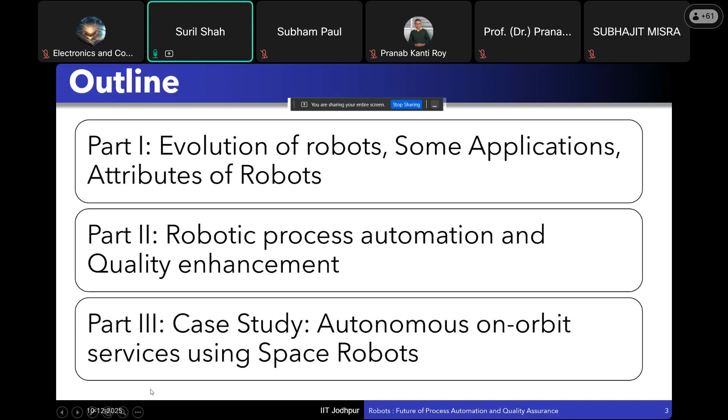I'll begin with the evolution of robots, starting with this image, which is the imagination of Leonardo da Vinci, a scientist and artist. He visualized a robot as something like a human, using pulleys, gears, and belt drives. This was conceptualized by him in 1495.

There was a lot of interesting work being done in the past that got lost. Similarly, this work also got lost and was rediscovered in 1950. Now its inner workings are displayed in a museum in Berlin.

Later, William Goodwin in 1867 came up with the design of a mechanical horse. Again, you can see a lot of gears, pulleys, and belts, reflecting the initial thought process of a robot that would imitate either a human or an animal mammal.

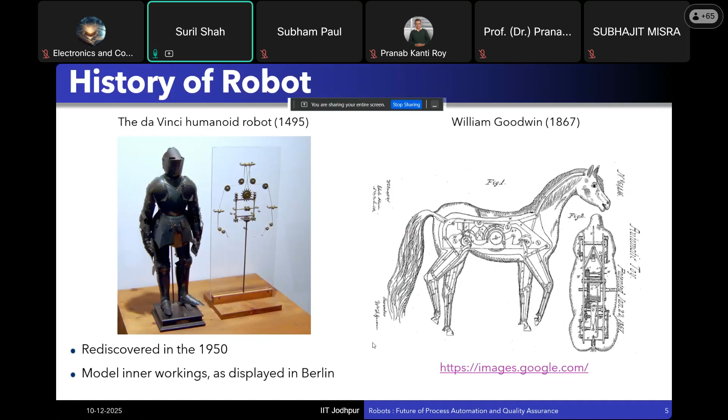However, the word 'robot' became popular in 1921 through Rossum's Universal Robot by Karel Capek, which featured characters such as robots, playing an important role in increasing the publicity of the word robot.

It became very popular in 1950, when Isaac Asimov wrote a fiction called 'I, Robot' and also gave the 3 laws of robotics. We may not get into these laws, but we'll see how the field of robotics evolved, with various researchers starting to work in this area during this time.

However, if you look at the initial thought process of Leonardo da Vinci or William Goodwin, they conceived a robot as a mammal or human, or a structure similar to one. But the first robot built or conceived for industrial usage was like a human arm—it didn't mimic the entire human, just the arm.

The first robot was created by Unimation Technology and was known as the Unimate robot, in 1961.

I'd like to emphasize one aspect: in contrast to a human arm, which has all revolute type joints such as spherical or revolute joints and a spherical wrist, the first industrial robot had a prismatic joint. We appreciate that a prismatic joint requires regular routine maintenance—like a vehicle with an IC engine that needs regular lubrication and servicing as dust accumulates. On the other hand, door hinges we hardly ever lubricate, unless they start making noise.

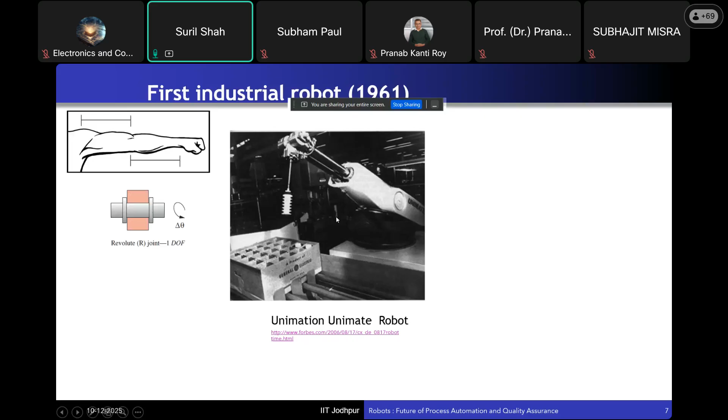Later, most industrial robots that replicate the human arm came to have 6 degrees of freedom. Here is one such robot, the Cincinnati Milacron T3 robot, which has all revolute joints, because with the advent of computational resources, we now have good capability to solve kinematics problems related to robotics.

This was in 1961 when the first robot was being built, and subsequently we find a lot of industrial robots in industries. I would like to emphasize that the original notion of robot was a manipulator arm used in factory automation. However, since 1961, there has been a lot of progress in the field of robotics, and its application and usage has penetrated various fields. I would briefly like to highlight some of the innovations which were done subsequently from 1961.

I would like to highlight this robot which was built by Stanford University, named Shakey, in 1969. The unique feature of this robot was that it was the first fully autonomous robot. It had a camera, rangefinder, bump detector, onboard logic. I like to highlight the year because I always tell students that if you are building something in your robotics lab or hobby club, at least you should build something better than Shakey, which was built in 1969.

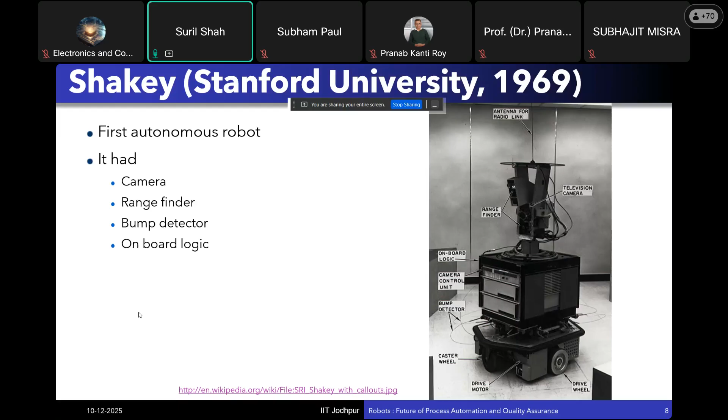Moving forward, I thought of introducing some work which will play a very important role in time to come, and which also aligned with the dream of William Goodwin, who gave the conceptual design of a mechanical horse. A researcher named Marc Raibert at Carnegie Mellon University started working on legged robots. He started with a one-legged hopping robot just to understand how robots balance themselves. I would like to show some of the videos.

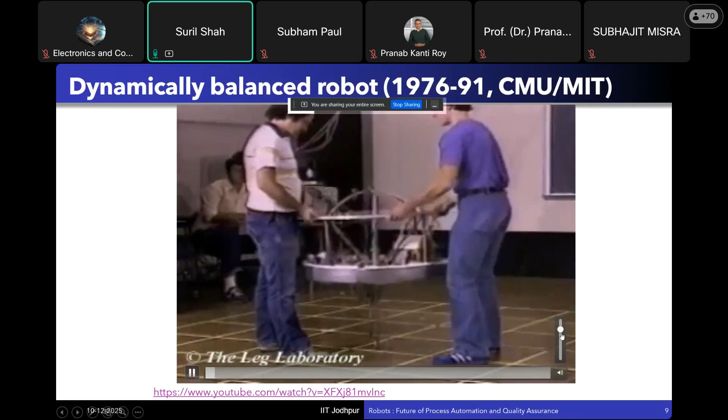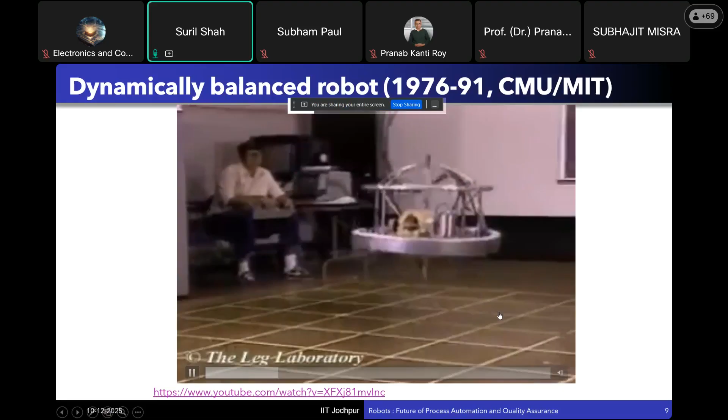Here you can see they have done very systematic studies on the one-legged robot. It is a kangaroo-like hopping robot, hopping on one leg. There is a well-defined environment, with square blocks on the ground, so it is working in a very well-defined environment. Subsequently, they introduced two legs. All this work was done from the duration 1976 to 1991.

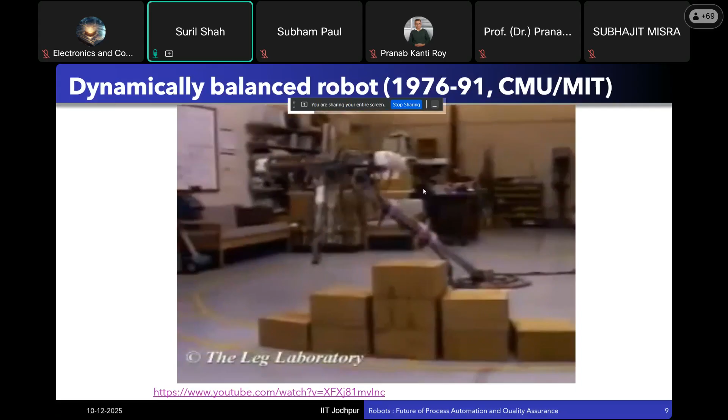You can see they also tried out high-speed locomotion with bipedal robots. They tried obstacle avoidance, where this two-legged robot was able to jump over obstacles, and it was also able to do a somersault. They did a lot of studies and tests. This was a very interesting set of research done by Marc Raibert and his group.

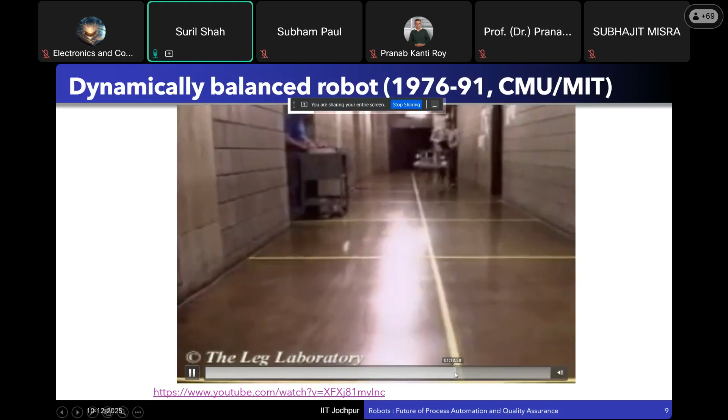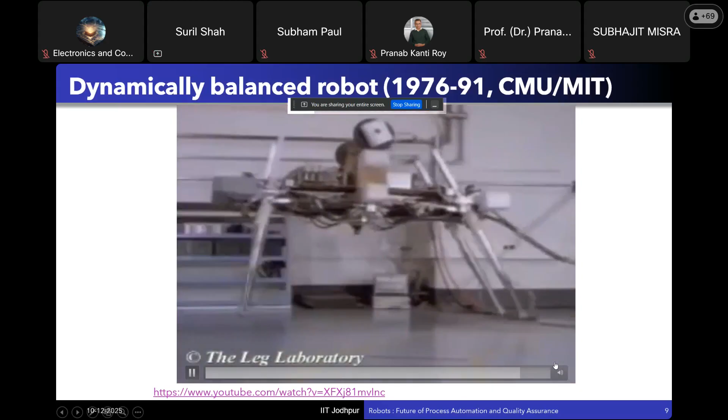Subsequently, they also extended this to a four-legged robot, and came up with an interesting set of results which are still being used by researchers working in the area of robotics. They tried out different gaits of legged robots. This was a very interesting set of activity taken up after the evolution of the industrial robot as a human arm, or something similar to a human arm.

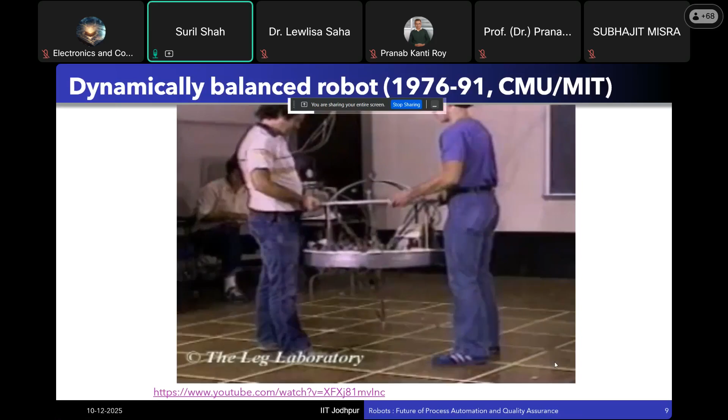Now moving forward, I'll come back to today. And when I say today, it may be 2-3 years ago or 3-4 years ago. This video is not the most recent video by Boston Dynamics. There has been a lot of interesting work done subsequently, but there is a link between the previous video and this one: the researcher who did work at CMU and MIT subsequently started his company called Boston Dynamics, which was acquired by Google, then Hyundai, and various others. It has created a very interesting set of robots which are going to play an important role in manufacturing as well as automation and quality assurance.

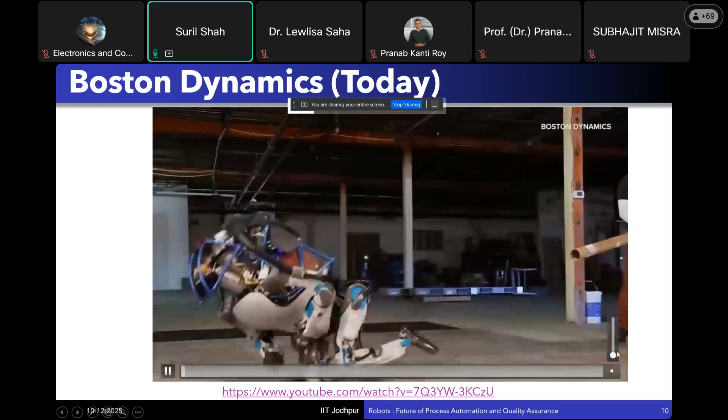I thought of showing this one video which summarizes the capability that we have achieved today, and a lot more than what I am showing has been achieved, because this video is a little old, but it will still give some idea of what we have achieved in the last few years.

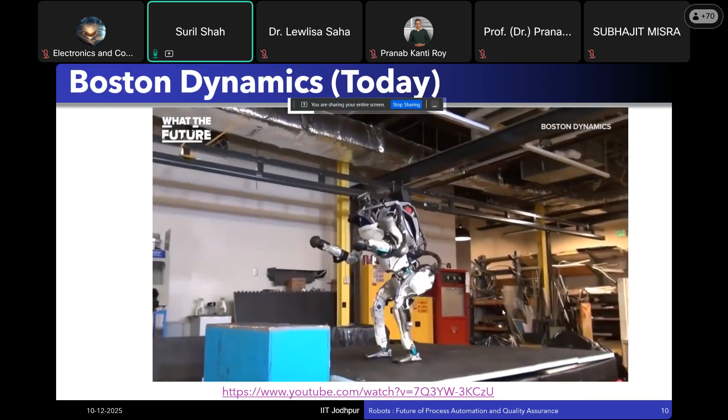Now you may see that these robots are not working in a very well-defined environment. There are no markers on the ground. These robots have come outside the laboratory, and have the capability to move on snowy terrain, jump from one obstacle to another without any marker on the ground. They have better stability than the robots shown earlier. They can be ready very soon to work alongside or replace humans in various workplaces and warehouses. They have the capability to stand on their own and learn from their mistakes.

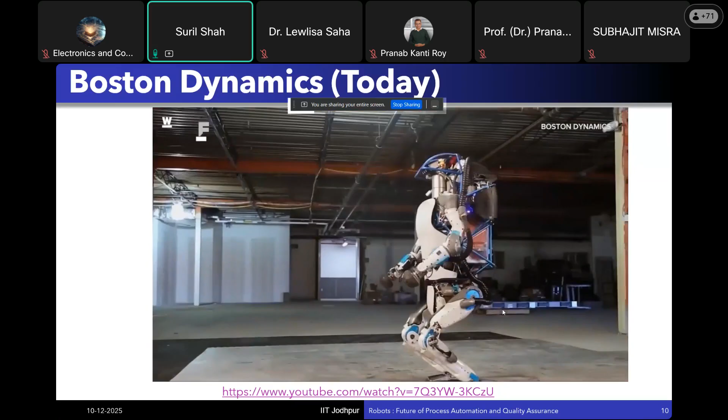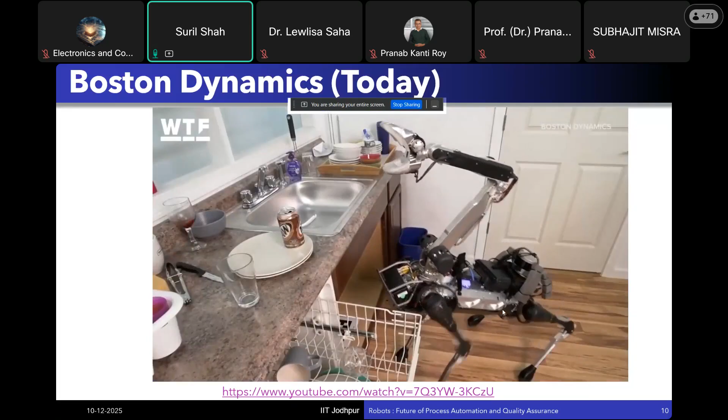Here is a very interesting robot known as Spot Mini. It is a four-legged robot carrying a manipulator, and it is opening a door based on its vision sensor. There is a robot, the same one, being used in the kitchen for object manipulation. It has a wonderful ability to climb stairs, and you can see how smoothly it climbs them.

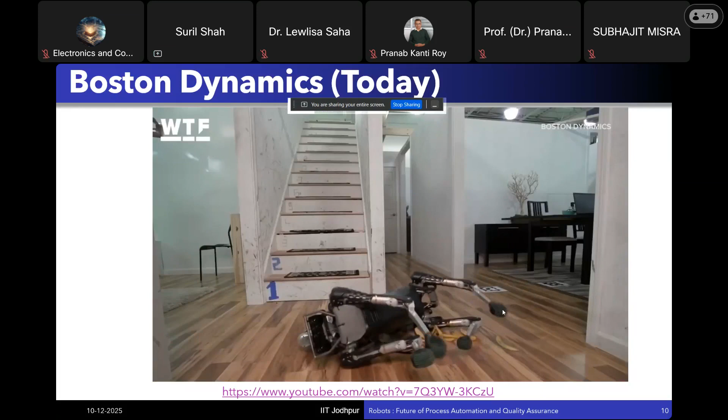It can rebalance itself, and now there are a lot of companies, and even in India, people have started building and making four-legged robots, and you will see that in time to come, that will play a very important role in industry automation.

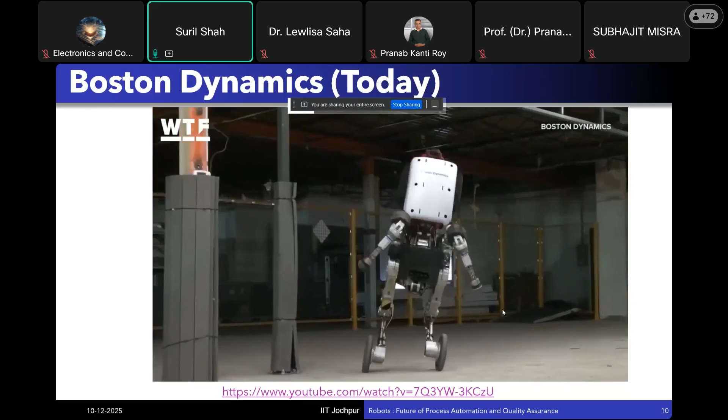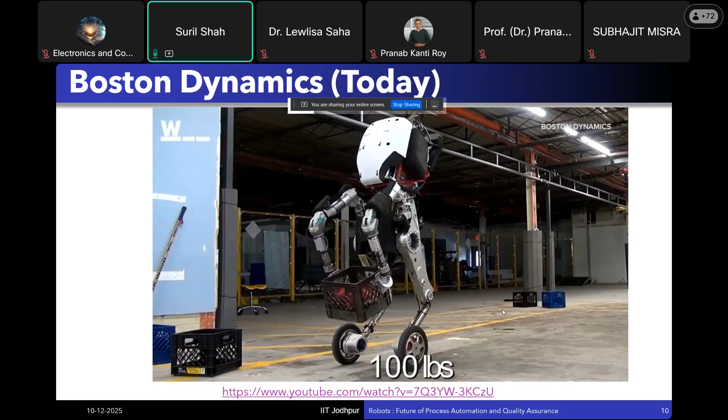Here is another interesting robot which is having wheel-leg combination. It is having two legs, however, the legs are attached with wheel at the end, which will essentially give us speed, better stability, and ability to lift heavier object. It employs intricate control strategy in achieving the capability that it has. Here you can see that it is doing endpoint control.

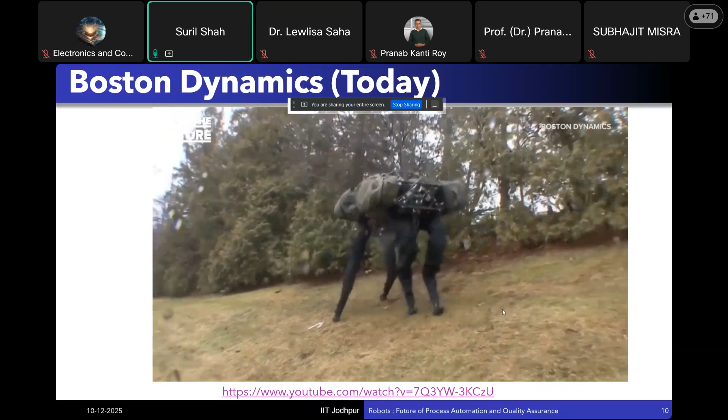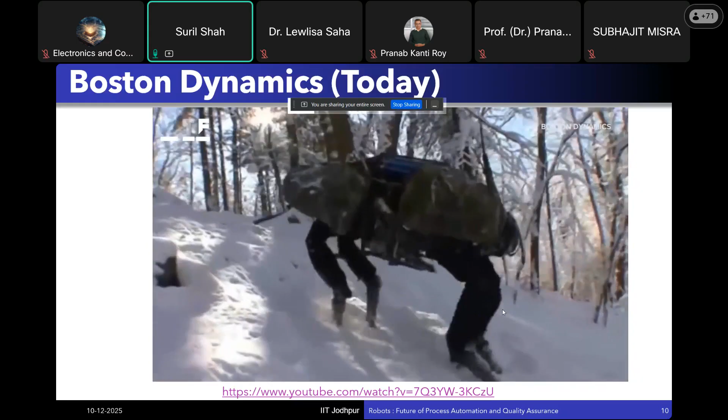This is another famous big dog robot, which you may see is negotiating uneven terrain. It is also taking external disturbances in the form of a kick, which was given on a slopy terrain. It is able to negotiate snow, even icy terrain, and such robots are going to play an important role in time to come, especially in defense application. You can see that it is able to negotiate terrain such as snow.

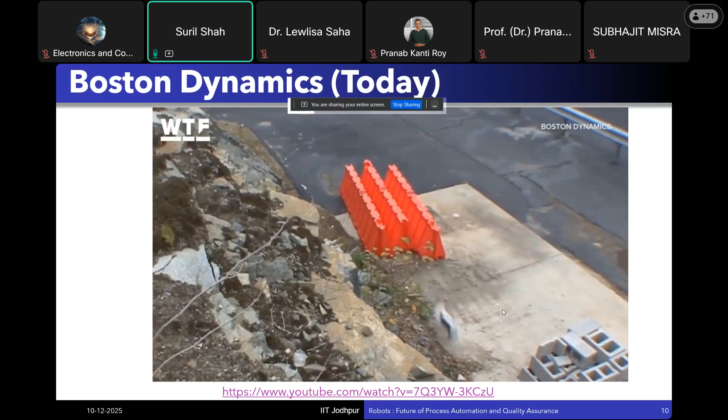This is a very interesting set of robots I thought of showing, because any idea that you may create may not require a lot of money, but it requires creativity. You can see that it's a very small robot, not very costly, but it can climb higher heights. For creating something amazing, you require creativity rather than money, and that's where we need to encourage our students to focus.

So I thought of showing some of the development, and now there are many more interesting robots with better capabilities that have come up, and you may find these robots on YouTube. But I just wanted to show the journey of an academician who started his career at CMU and MIT, spent 20 years of his research, and subsequently ventured into product development, now creating some of the best robots in the world. If he can do it, then many of us can also think of taking this journey in time to come.

With this brief introduction of how advancement of robots has happened, from industrial robots to the diversity of robots that we are having, I would also like to emphasize that application of robots is not limited to industrial environments such as automobile industry, where you will find thousands of robots in the assembly line. There are many applications which have come up, and I thought it is very important to look at these applications, because automation is not only limited to industry.

I'll focus on how robots combined with automation will bring in inbuilt quality assurance, and that can be seen in various fields and aspects. That's why I thought of showing some applications which would give you an idea of the broad perspective or application domains that one will have to deal with as far as robotics is concerned.

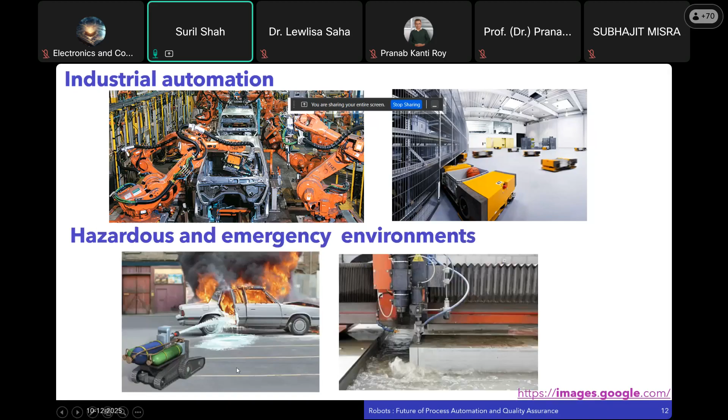Robots can also be used in emergency and hazardous environments, as can be seen here, where robots can play an important role and replace humans in environments which could be dangerous to humans.

It can be used increasingly in surveillance and exploration applications in time to come. In fact, they are being used today as well.

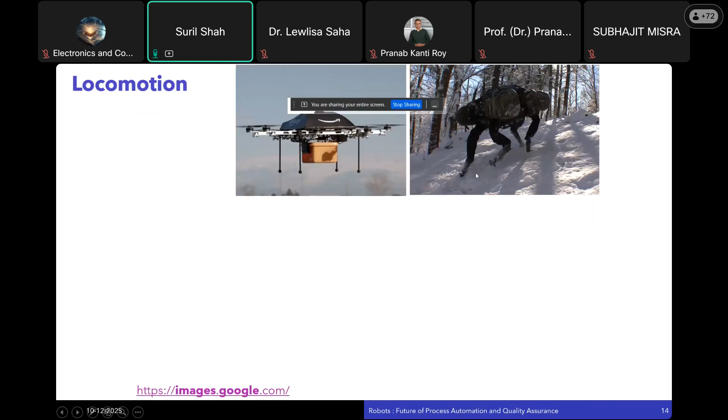Robots can also be used for locomotion. For example, Amazon long ago started its priority service based on drones in the USA. And here is the big dog, which we already saw in the video, which can be used for locomotion purposes, and it has a defense application.

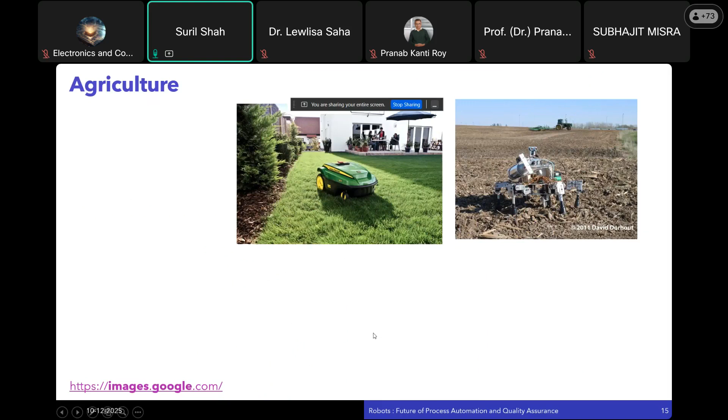Moving forward, in agricultural industries there is a shortage of workers, and there are a lot of robotic applications being developed, including large machines. However, not every farmer can afford these large machines. On the other hand, one can always have robotic solutions which are cheaper, smaller, simpler, and can be used even by farmers who are not very rich.

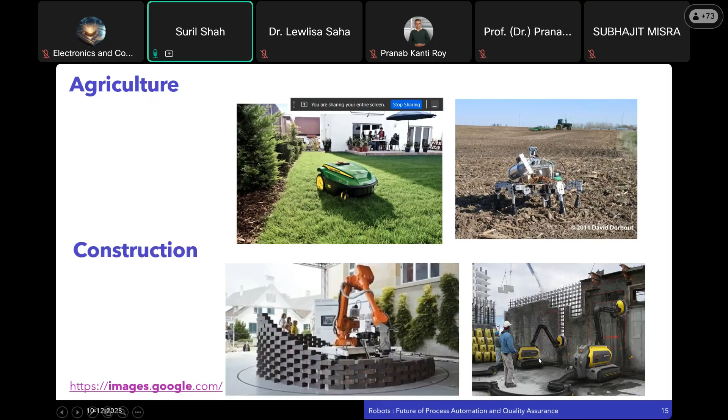There are also applications where robots are being used for construction, or 3D printing of houses. Here you can see images where robots are being used in construction applications.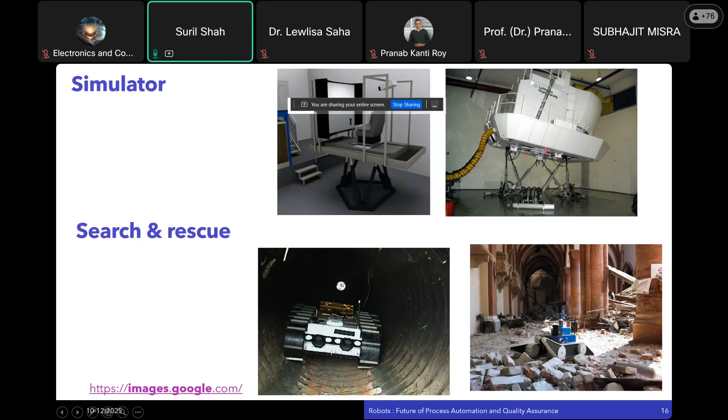There are robots which can be used for certain rescue applications. Specifically, the second image shows a robot named Packbot, which was being used during 9/11.

There are robots being used for surgical applications, and even in my city, Jodhpur, a few years back AIIMS Jodhpur very proudly mentioned that they had completed 1,000 robotic surgeries. In fact, that was 5-6 years back, and by this time they must have done more than 5,000 robotic surgeries in the city of Jodhpur.

There are also micro and nano robots, and there is a lot of ongoing research into robots that will get into the human body and perform amazing repair and other tasks in time to come, which will certainly give us longevity.

There are also other categories of robots known as exoskeletons. They are like wearable robots. In the first image, you can see a wearable robot that can be worn by a human worker, which will uplift the capability of the worker in doing work.

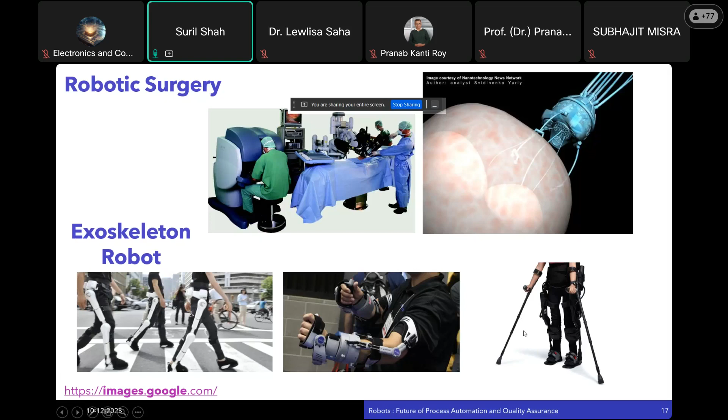One can also use exoskeleton devices for gaming and other purposes. Here you can see a person with disability being enabled by an exoskeleton. These are all actuated exoskeletons, as shown in the first and third images, giving the capability to humans to walk.

There are also a lot of assistive robots that will be used in homes, shop floors, laboratories, and various other places. You may find vacuum cleaning robots now very cheaply available on Flipkart and Amazon, easy to purchase, doing a lot of cleaning. Their quality and precision has also improved over time, and this kind of robot is going to play an important role in the service industry in time to come.

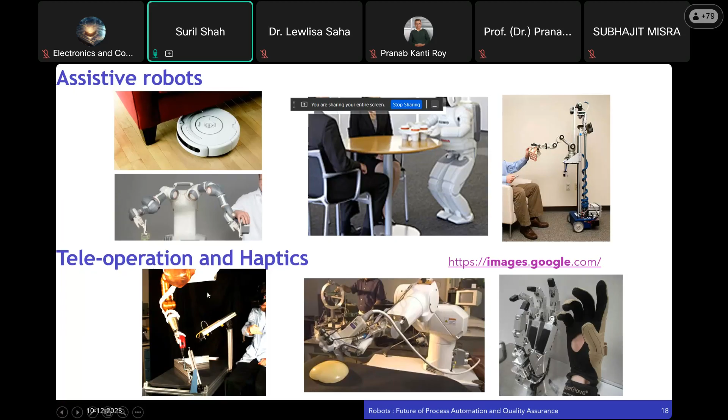There's also another use case where robots are used for teleoperation. There may be scenarios such as nuclear plants or other applications where teleoperation plays an important role, with a human teleoperating the robot. That's another interesting area. Haptics is the sense of touch, and robots are being deployed for teleoperation with the help of exoskeletons, as seen in the previous slide.

I thought of showing this simple video, which is also old, and there's been a lot of progress done subsequently. But it gives us an idea that today the field of robotics has penetrated workplaces and shop floors in many developed countries, and will increasingly come into the picture in various industrial environments in the Indian economic scenario.

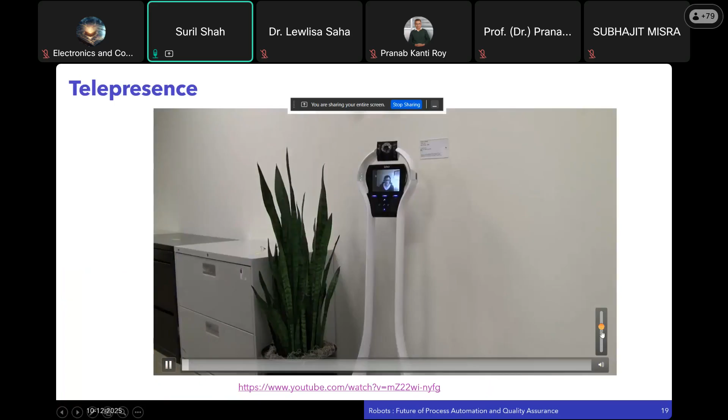I'll quickly take you through this video where there is a simple mobile robot in a workplace environment, where the boss has entered into this robot and is interacting with an employee, getting updates on things. Such robots are very cheaply available today and are being deployed. So telepresence through robots would be very important and will play an important role in time to come.

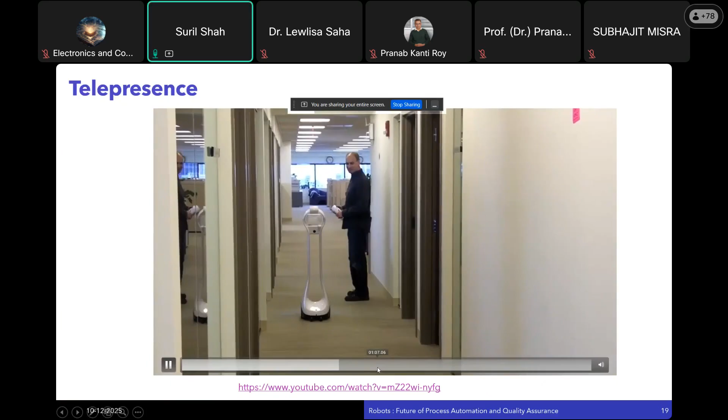Yes, I'll fast forward and summarize the first part. I wanted to emphasize one aspect: the notion of what qualifies as a robot has changed greatly over the years. Long ago I stopped giving the laws of robotics by Asimov because those laws have evolved over time, and even the robot itself has evolved. Now you find different kinds of robots used in different applications. It's important to revisit the definition of robot and its defining attributes, which is what I'll focus on before the main presentation. So it's important to understand what are the attributes of a robot, what does it do, and how do we define it.

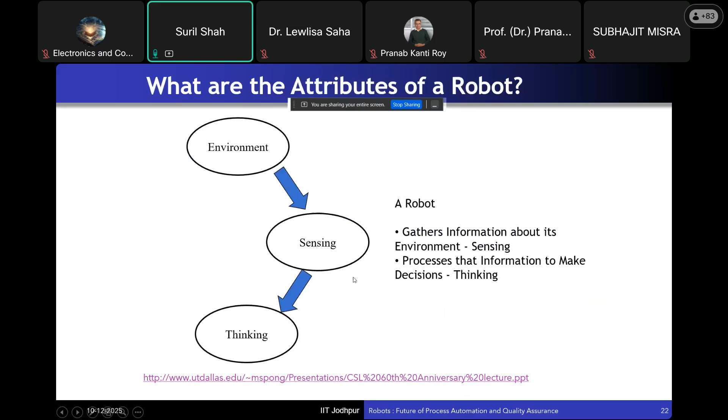The primary work a robot does: first, it gathers information about its environment and obstacles around it through sensing. Next, it tries to localize and process this information to make subsequent decisions - that's thinking. So it senses information, performs thinking, and whatever action it takes is based on this sensing and thinking. If we improve the sensing and thinking ability, the quality of action and its consequences will also improve. So first is sensing, second is thinking, and third is acting on the environment - these are the main attributes of a robot.

So any robot that you think of senses the information, processes it, thinks about it, and then comes up with an action. It applies the action and then again looks at what is the consequence of the action taken by the robot.

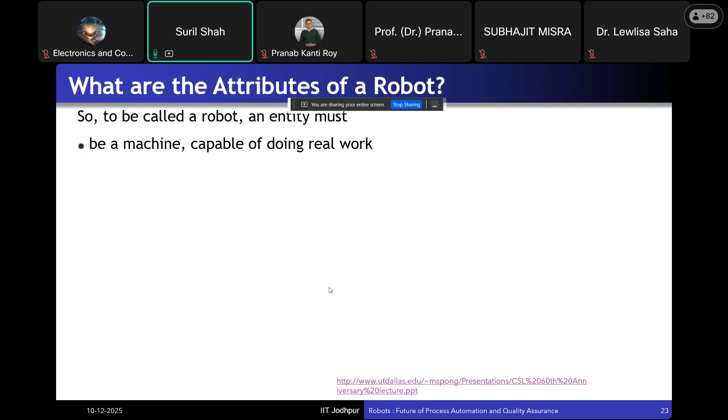So how do we define a robot? To be called a robot, an entity must be a machine capable of doing some real work. That's the primary requirement. As it performs sensing and makes decisions based on thinking, and whatever action it takes on the environment, it again gets feedback in terms of sensing. So it should be able to work in closed loop fashion under computer control. Therefore, a robot is a mechatronic system, at the heart of which is feedback control.

Control has taken on a different role today. When I talk about control, it may not be classical control - it could be data-driven control, stochastic or predictive control, or even learning-based control such as reinforcement learning. That is going to be the heart of the robot, surrounded by sensing, which is very important. You'll have software, electronics, and mechanics. Whatever action it takes is purely based on the feedback control law, which allows autonomy and performance in unstructured environments with obstacles, clutter, dynamic obstacles, and even human beings. Learning is going to play an important role - it is and will continue to be important in achieving autonomy and performance in unstructured environments.

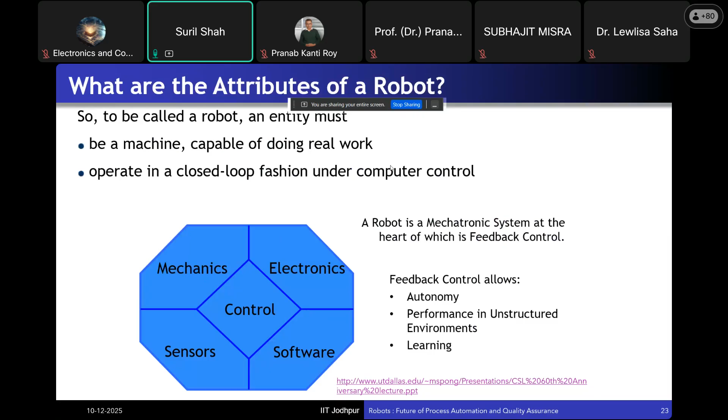So I would like to show you one such humanoid robot - the humanoid by Honda. This is an old video, my apologies for showing old videos for this presentation, but these are still relevant. I thought of showing this.

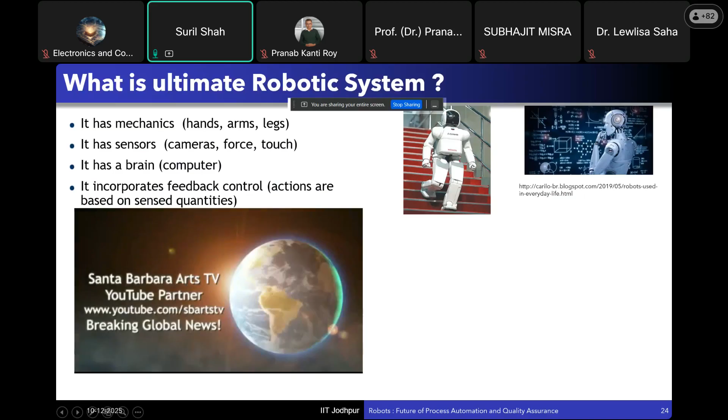So this is a video released a few years back by Honda, where you can see that this humanoid is able to navigate in an unstructured, unknown environment. It is able to avoid obstacles in the form of humans, so it has a very interesting set of capabilities. Now let's try to have a look at the walk of the humanoid, the way it is walking.

So maybe there is a question for participants. Do you have any observation about the way this humanoid is walking? Whether participants have any observation? I'll keep this video running, and if you can just observe the way this robot is walking, do you have any comments to make? Whether it is a very conservative walk?

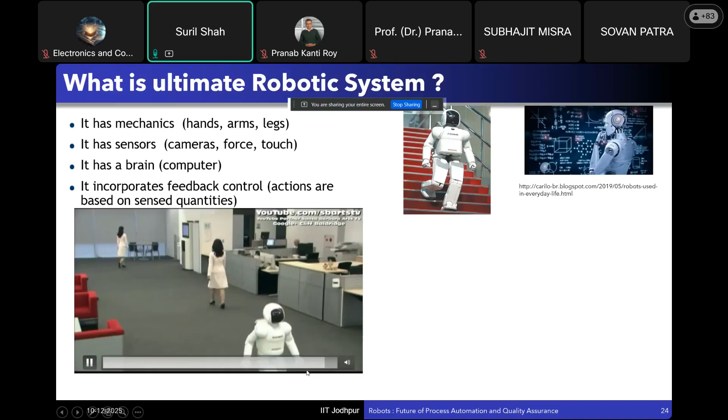And hence, if you carefully see this walk, the robot is bending its knee and walking, which obviously is an energy-consuming task.

Now, robots today consume a lot of energy, and we need robots which are more natural and consume less energy. There are limitations as far as actuation and sensing are concerned. If we can cross this threshold of sensing, actuation, and energy, obviously we have made a lot of progress as far as AI algorithms are concerned, but once we cross this threshold of getting highly responsive sensors and actuators, we may be able to achieve much more in time to come.

Nevertheless, I would like to show one more video, and before I move to the next phase of this presentation, I would like to ask one question to all the participants. Please carefully look at this video. I'll rerun this video.

So don't you think that this robot is walking like a casual college-goer, and it is walking in much better manner than the Honda robot which I have shown? Any guess about how many actuators the second robot uses?

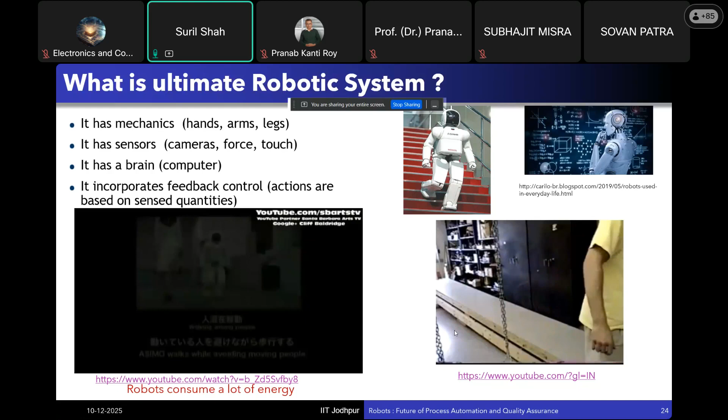Yeah, it will be around 6 or 7. So the interesting part is I will run this video again, and I would like to emphasize that it is not having any actuator at all. It is walking down the gravity, and you can actually create a structure which can, without motor, walk naturally down the gravity. And if we can do this, can we try to adapt some of the principles of dynamic walking, the way we get into a natural rhythm and keep on walking with minimal energy, and create today's modern machine? That's where there is a lot of effort and work being done in today's world. Can we create energy efficient robots which can tackle challenging environments?

So considering this background, I thought let me now get into the main topic, which is robotic process automation and quality enhancement. And me being a roboticist, I see that if we try to use robots for automation, it will automatically lead to quality enhancement, and that's what I would be focusing on in today's talk. I would again like to reiterate that this topic is very important as major industries across the globe are moving towards intelligent, adaptive and data-driven manufacturing. And if you would like to compete with China, it is very important that we use robots for process automation and quality assurance, as we are much behind what they have achieved in terms of factories. You'll also get some idea as I move ahead in the second part of the presentation.

So let me give you some statistics. As far as the automation market is concerned, it is expected to grow significantly in time to come, and it is projected that by 2032, the market would be worth 600 billion US dollars. In addition to that, AI will also penetrate significantly in the area of manufacturing, and its usage will increase 5 times what we are having today. This is the number given.

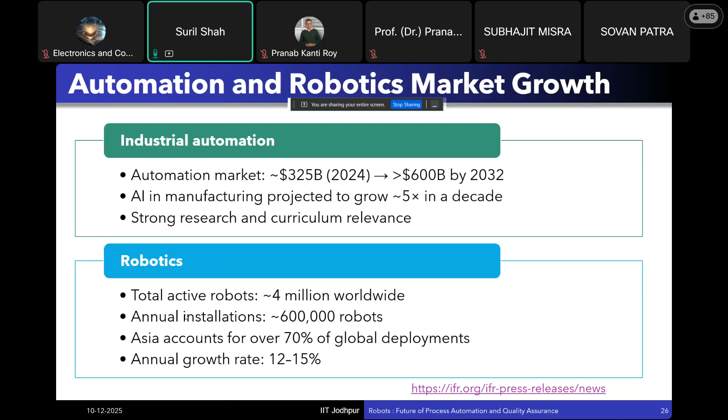When I say robotics, this refers to all kinds of robots, industrial robots as well as service robotics. I would like to give you this image, which essentially focuses on industrial robots, which are being increasingly used in manufacturing applications for handling, assembling and deassembling, welding, soldering, clean room, dispensing, processing, and others. It is projected that today we are in 2025, and by 2033, the market will grow by 163.9 billion US dollars, expected to grow with a CAGR of 11.5. So here we are majorly referring to industrial robots, which are increasingly used in manufacturing industries.

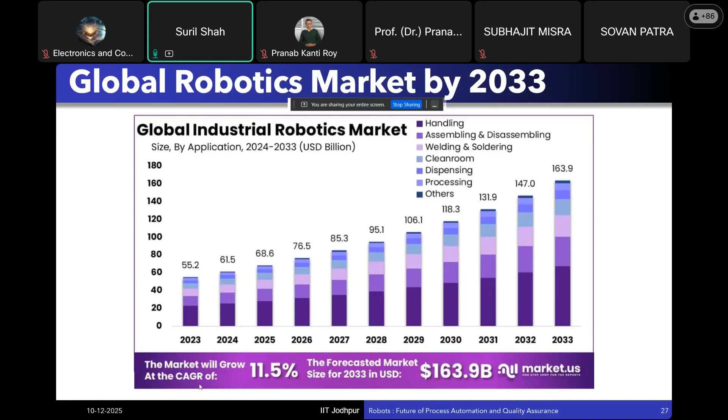So when we talk about nation building, Make in India, this is going to play an important role. This number is significant, and this is also an opportunity for people like us who have been working in the area of manufacturing, robotics, automation, where we see significant opportunity. We need to develop interesting curriculum and workforce in the form of students, who will participate in industrial growth in time to come, because this number in time to come will significantly increase in India.

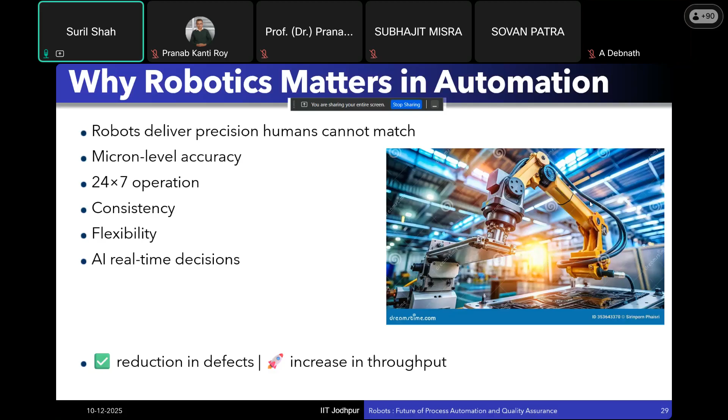So if I compare or summarize the process impact of manual intervention versus robotic, we can say that robots can outperform in terms of speed. They are much faster. They work objectively, are highly scalable, and the error rate they generate is also significantly lower. That's one of the reasons robots should be used in automation. In a subsequent slide, I'll show that when you use robots in automation, quality assurance is inbuilt.

It significantly improves the quality of product. Rather than seeing robots as quality inspectors, we see that robots are contributing to increasing overall quality of the product.

I would also like to touch upon the Industry 4.5/5.0 revolution. Professor Kaushal must have mentioned Industry 4.0 in his first talk, and given a nice journey from Industry 1.0 to 5.0. I'll talk about Industry 5.0, which talks about collaborating with humans, which essentially would lead to sustainable manufacturing. It will try to take away some of the limitations of Industry 4.0, which is machine heavy.

On the other hand, Industry 5.0 talks about sustainable manufacturing, where robots will collaborate with humans, take AI-powered decisions, and take away some of the tasks which are repetitive, cumbersome, where human subjectivity will increasingly affect accuracy, quality, and hazardous tasks. In fact, it will amplify the creativity of humans, because humans are inherently creative, and autonomy, achieved through AI-powered decisions, will amplify humans' creativity.

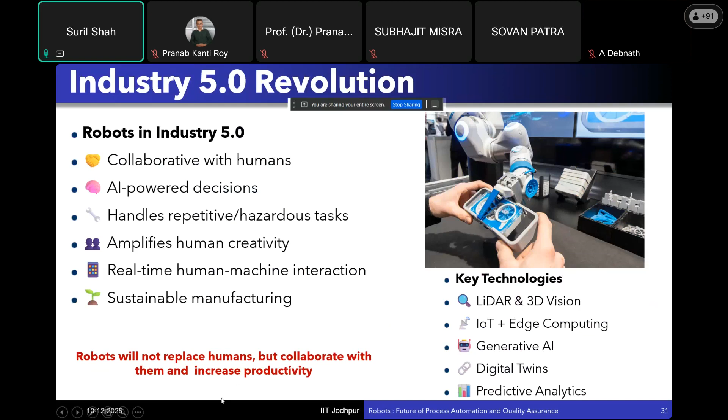Moving forward, at this juncture, I would like to emphasize—we have seen a gamut of robots in applications of robots. However, I would like to emphasize these three robots which are going to be increasingly used in industrial environments in time to come: industrial robots, the robots you've seen in assembly lines of automobile industries, used for pick and place operations, welding, painting.

This robot will get embedded with the emergence of Industry 5.0, and knowing the fact that now robots are not meant to be kept in cages, they'll be working along with humans, collaborating with humans, and we need to create an environment which is safe for human-robot collaborative work.

And the second category of robot would be collaborative robots. In addition, there will be a lot of mobile robots, which could be wheeled robots, legged robots, automated guided vehicles, which would be used increasingly on the shop floor and which would give mobility, logistic advantage, and enable material flow. So these are the three kinds of robots primarily going to play a very important role in time to come as far as industrial automation is concerned.

Now, it is not only robots, but there is also a very popular notion known as robotic process automation. Robotic process automation uses a robotic agent - not a real hardware, but a robotic agent which follows a set of rules given by input data, and it performs automated testing and quality assurance.

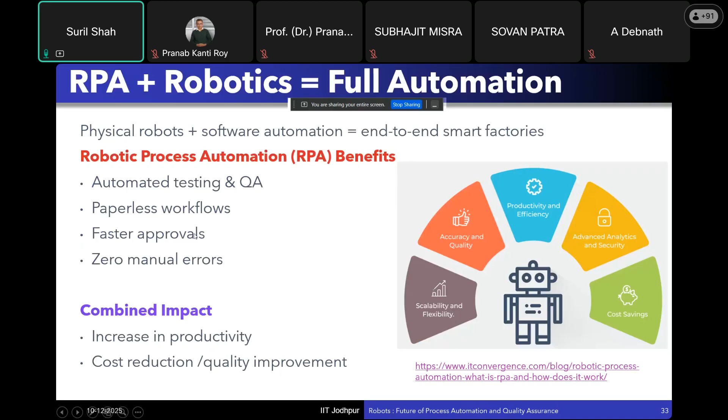So with this foundation, I'd like to go back to the main theme of this talk, which is process automation. If we try to understand process automation, it essentially tries to achieve automation by encouraging machines and software with minimal human intervention. Process automation leads to significant productivity, safety, and quality, and as I've been repeatedly telling, it is key to smart manufacturing that we are trying to see today getting implemented even in the Indian scenario.

On the other hand, we have seen some capability of robots, where robots are consistent performers, do tasks repeatedly, and create products of similar accuracy day after day. So high accuracy, repeatability - it can handle repetitive tasks, avoid subjectivity of human error, reduce human fatigue, and enhance workspace safety. So when I do process automation using robots, it eventually leads to quality assurance, and the outcome would be significant improvement in dimensional accuracy, uniform product appearance, lower defect and rejection rates, and higher customer satisfaction.

Hence, what I'd like to emphasize, being a roboticist, is that robots build quality directly into the process rather than just inspecting it at the end. So let's not see robots as a quality inspector - we'll also have one slide where we talk about it - but rather I, as a roboticist, would like to emphasize that process automation through robots will lead to automatic quality assurance. That's something very important to look into.

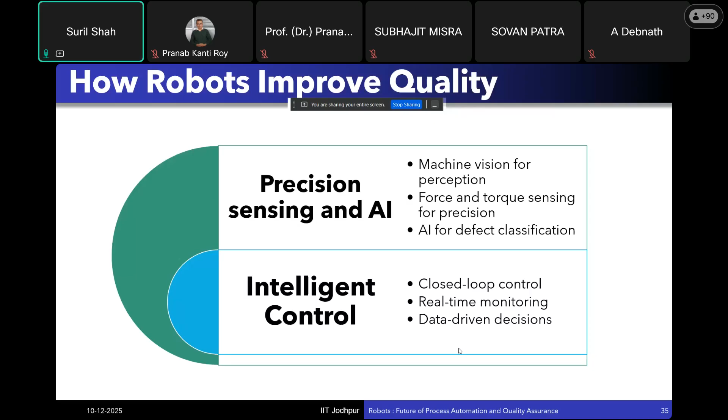And one such example is nothing but automotive plants using machine vision for detecting various defects. I assume that Professor Desai must have also mentioned vision-based defect detection in his presentation.

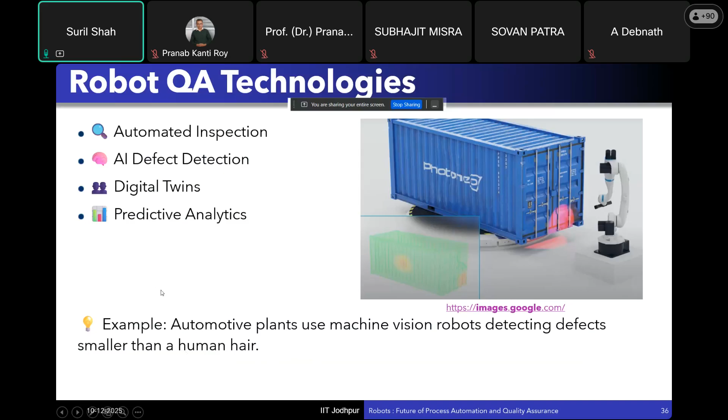So moving forward, I am reaching for summarization of the second part in next 2-3 slides.

So I see robot as a quality gatekeeper because it has the ability to inspect 100% of product. If you rely on human, it may so happen that depending on subjectivity, I may miss some products to be inspected, I may oversee some aspect, but robot will not. Considering the sensing and actuation capability, it will also serve as a precision executor with nanometer accuracy.

It will build on a lot of data. It is a data collector. You can always go back to data and make decisions based on this data. It will keep a log of this data, which should be very valuable for improving accuracy. Robot will also learn based on this data, various task operations.

It is also a risk eliminator because it can work in hazardous and emergency scenarios, handle dangerous material, hot material, risky material. And it is also a consistency guardian, which will keep on creating the same part day after day objectively and certainly outperform human in that context.

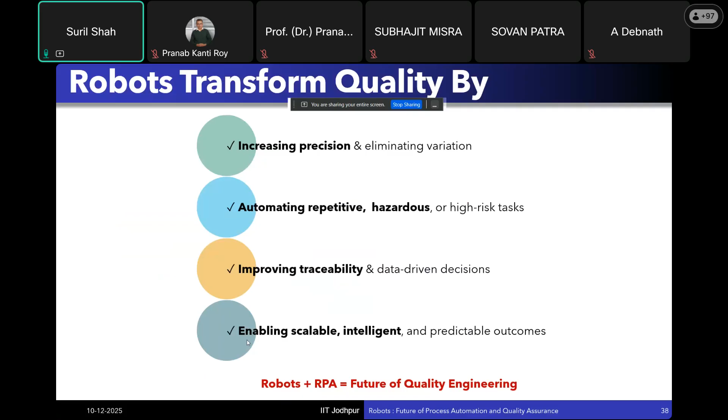And again, I would like to emphasize that it is robot with RPA which is going to play an important role. So it is physical robot with software robotic agent, which is nothing but the future of quality engineering. And I'll also try to float some thought process and ideas which can play a very important role for the future of quality automation.

So we'll have self-learning robots. Based on data and today's AI advancement and machine learning, it will learn on its own and keep on improving its capability. That's what is going to be very important in time to come, and a lot of research is being done.

It will also build on Internet of Things, sensing and real-time alerts, and it may also perform predictive maintenance on its own.

It will also ensure lights out operation. This was very popular for the Philips plant, where there were all robots in the factory, and the factory could run 24/7 as everything is being done autonomously. You don't need any lights in the factory, and it can keep on working. There are no humans, no lights. That's how this term, lights out factory, came into picture.

Digital twins is also a very important part, where there is a simulation running parallelly and it is predicting the future. And based on the predicted future, the actual physical hardware is taking decisions, modifying its decisions. And with all this, we may be able to create space-based reliability for extreme environments, as I would also be talking about space robots in the third part of my presentation.

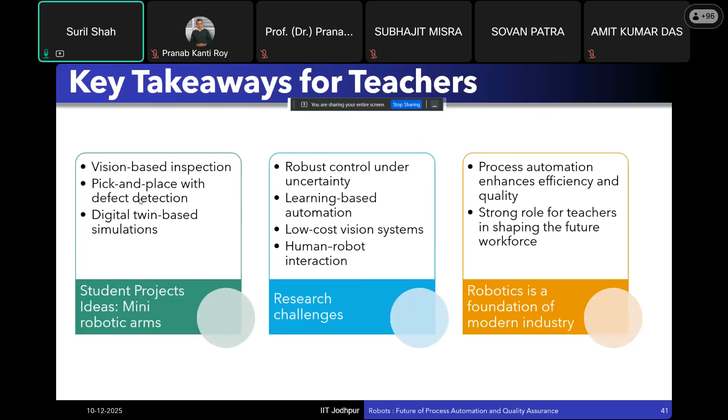Now I would like to show a case study that is towards achieving autonomy, and this also involves a robot. I'll be referring to space robotics for doing all operations in an autonomous manner. I'll try to talk about some research challenges, and eventually it will lead to quality operation, zero failure operation. That's what this case study focuses on. So indirectly, it emphasizes autonomy and the usage of robots, and the eventual output is nothing but quality assurance in a way, a repetitive task that one would be able to do.

As I've been doing research in the area of space robotics, I thought of highlighting some of the challenges that space faces. The image you see is of Chandrayaan 3, and we have Pragyan rover, which is also a robot, and an entire operation was done. It has a lot of inbuilt autonomy, as well as teleoperated control, so it's a combination of semi-autonomous operation. Nevertheless, autonomy plays a very important role in this mission.

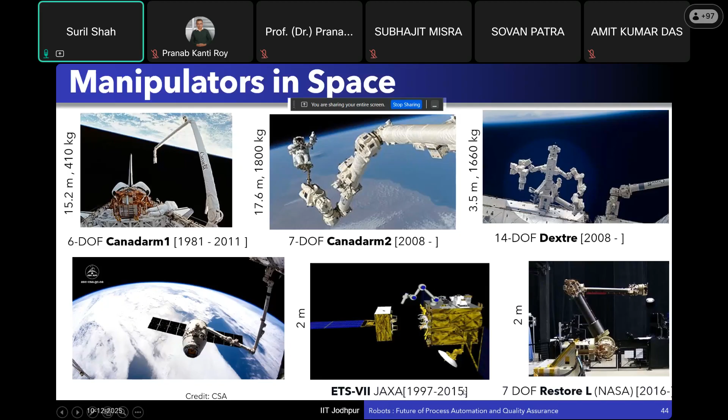Even there were some robotic activities which are being done by Japanese space agency JAXA and NASA in the past. So these are some of the evidences of robots usage in space, and my research work essentially focuses on on-orbit services, which is nothing but usage of satellite-mounted robotic system for inspection of space station satellites, repair, refurbishment, refueling, construction in space, capture, orbiting of objects and debris. And obviously the important thing here is autonomy, usage of robot and quality assurance.

When I say quality assurance, I would like to design algorithm in such a manner so that task is being done with zero failure. Here is an example of some of such operation where you can see that the antenna is being fixed in space with help of space robot. You can see robots are refueling the orbiting satellites. Yes, here you can see autonomous assembly of antenna, because anything outside satellite, it's very important that things are being done with help of robot with utmost precision.

At IIT Jodhpur, I work on reactionless manipulation, dynamic identification, capture and post-capture control of space robot. We have also developed an Earth-based space robot, and then we also work on vision-based control of space robot.

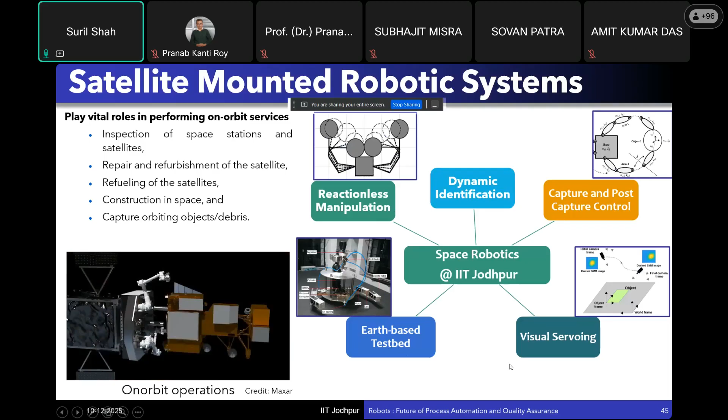So I'll very briefly take you through one problem of capture of orbiting object by space robot. This is a very challenging and important problem because there are more than 3,000 inactive satellites in space, and there are more than 31,000 debris of size 10 centimeter or more. So it's very important to mitigate this debris by some means, and what we are focusing on is satellite mounted robotic system.

So you can see that there is a satellite mounted robotic system which is mitigating a debris, which can be a non-functional satellite that needs to be either sent back to Earth or into graveyard orbit.

And there are three major operations. In the first phase, satellite mounted robotic system approaches the target. Then there would be capture phase where there would be impact and capture, so we need to ensure that there's a stable contact. And then there would be post-capture maneuvers.

Now in space, these satellites are free floating, and there would be non-holonomic constraints if the satellite thrusters are being shut off. So the satellites would be free floating, and this would bring in a lot of challenges, and these challenges we are trying to solve as a part of our research at IIT Jodhpur.

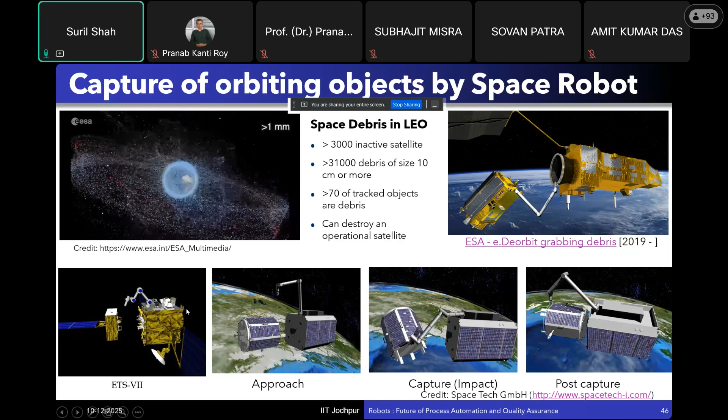Now that may require replanning. We need to mitigate this attitude disturbance. We may also require to minimize impact when these arms are capturing a target, and we may also need to take into account various constraints in the form of singularities and obstacle avoidance. We've come up with an interesting approach where a planning based approach is employed, where we try to plan motion of the robot backward, where given velocities are imposed, and then we try to perform control in the forward direction. So we come up with an interesting path planning based strategy and time scaling approach.

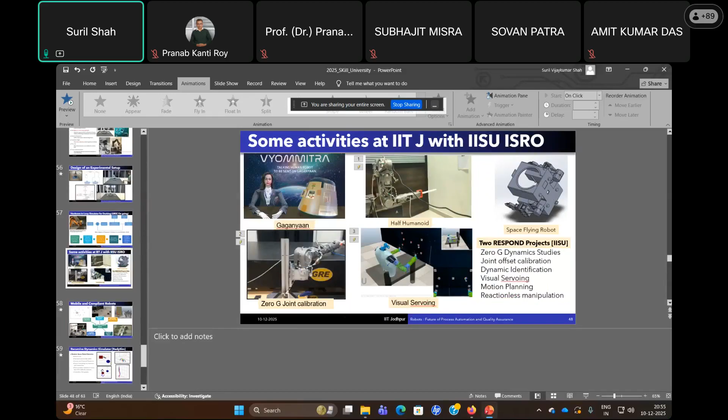Another important thing is when we try to capture an unknown target, there is a problem as far as post-impact stabilization is concerned. There's also a closed loop constraint. What may happen is that when you try to capture a tumbling, orbiting object with a dual arm, the satellite may get reoriented if it is not being controlled, if it is free floating, and it may change its attitude. So the idea is can this entire operation's post-impact control be done in such a manner so that the satellite-mounted robotic system performs this operation in a reactionless manner.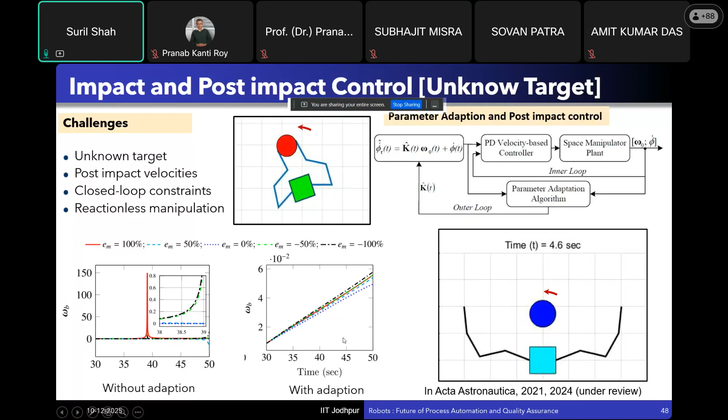We have also been working on an interesting dynamic identification technique where we don't rely on low signal to noise ratio signals, because acceleration and torque signals have low signal to noise ratio. We've come up with an approach to perform dynamic identification, where we try to get the mass and inertia properties of a robot that's already assembled, because you may need to update these properties in real time as fuel is consumed, and friction and damping parameters change. In real time, without disassembling the robot, you need identification to improve control performance.

And we have come up with a very interesting velocity momentum based approach for dynamic identification, which we published in AIAA JGCD.

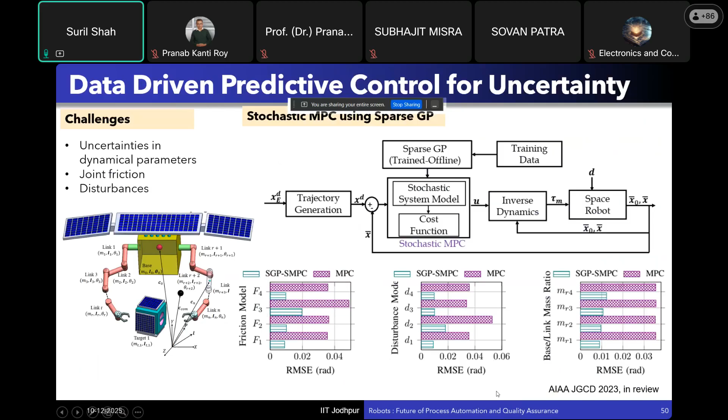We also did data driven predictive control. Many times, the control strategies you employ rely on the dynamic or model parameters you have. Nevertheless, it can be very challenging to precisely estimate joint friction and disturbance. We've come up with an interesting data-driven control strategy which uses stochastic control. We've shown that for different friction models, the root mean square error based on our algorithm, which is a sparse Gaussian process based stochastic predictive control combined with MPC, performs significantly better for different friction models, different disturbances, and different base to link mass ratios. This was one of the important contributions we have made.

Very useful to replace teleoperation. In performing various proximity operations, autonomy will also play an important role. And this visual servoing would be a very good substitute of teleoperation, where you can perform operation in an autonomous manner.

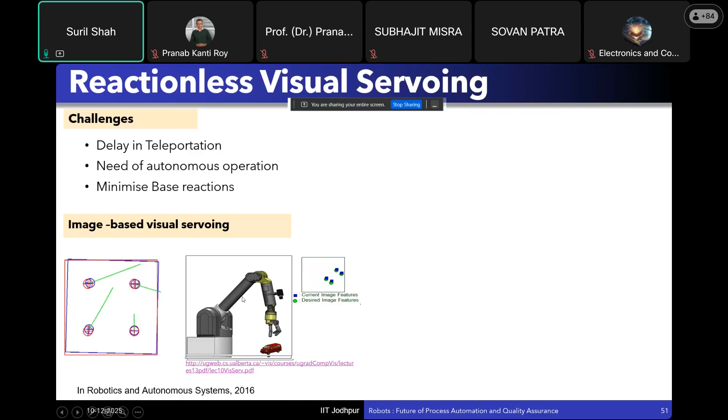The research idea we were having is, can we do visual servoing in such a manner so that attitude disturbances are minimized as far as possible? We came up with a very interesting algorithm. I'll just run the simulation where you can see there is a dual arm robotic system moving in such a manner so that error in image space is getting reduced, where the blue image is converging to the red image.

In addition, we are also ensuring that a lot of constraints are being adhered to while performing this operation. We also did some interesting work where we have done path planning in image space, and embedded constraints such as joint limit, collision, and singularity, improving the performance of our algorithm. Again you can see visual servoing being done successfully. We are also trying to avoid singularity and minimize base reaction. So the idea here was to come up with a path planning based approach in image space which performs visual servoing with singularity avoidance and minimization of base reaction.

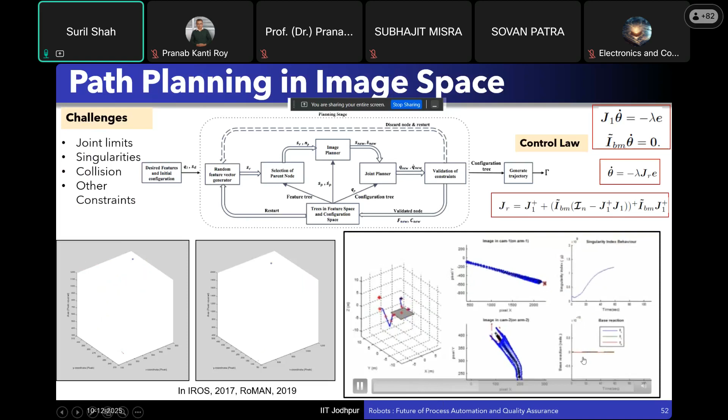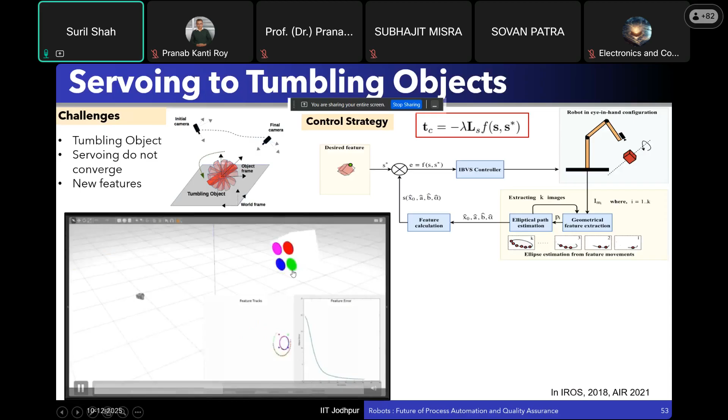Here you can see a camera moving in such a manner so that the current image is converging to the desired image, and eventually the feature error is getting down to zero. So the camera is servoing to the moving object in such a manner that we get the desired image. Here is the demonstration where you can see the object is tumbling and the robot is servoing to the tumbling object.

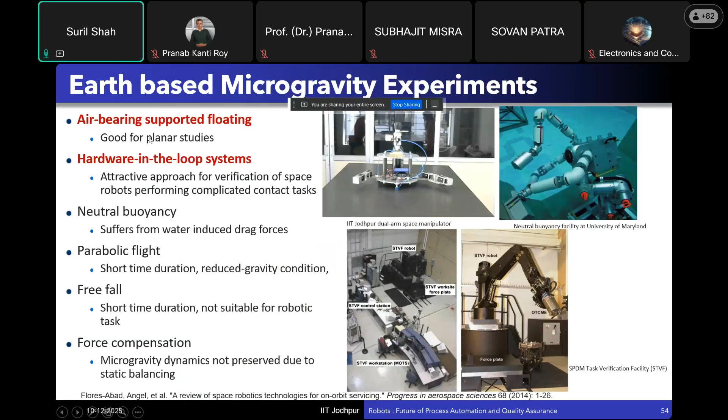So we focused on two aspects: one is the air-bearing testbed to mimic the space scenario, and hardware-in-loop simulation, which I'll very briefly touch upon. I will be concluding my presentation in the next two slides.

Here you may see that we are mimicking a satellite, where a free floating scenario was envisaged with the help of this setup, where the object is mimicking a satellite. There are air bearings, and we can create this free floating scenario with the help of this air bearing testbed.

So this can help very well in mimicking planar scenario. We also include embedded hardware, sensors, actuators, and you can see that there is a robot which is integrated, a dual arm setup.

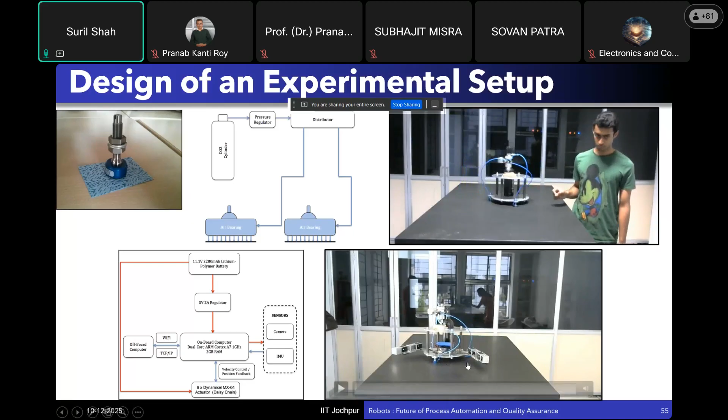Obviously after some time the setup is drifting, so one has to be careful, and it requires a clean room, dust-free environment, and a highly finished granite table. However, we could demonstrate here that we could create a setup and do some meaningful experiments.

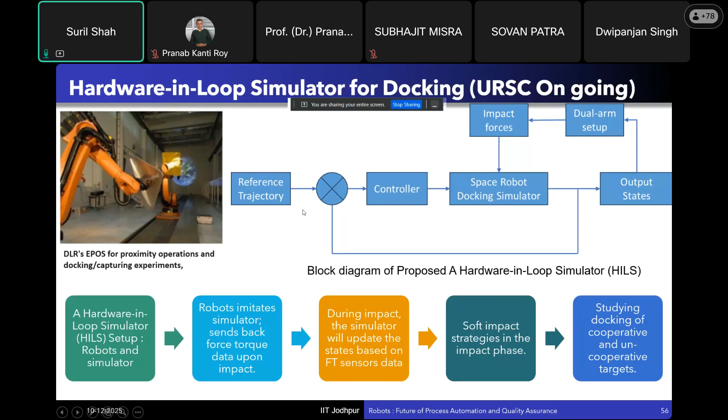So with this, this is the idea of hardware-in-loop, such an interesting topic is going on, and people should be very careful to keep their minds at ease. I think we are now, in today's world, we have become prone to everything, and the kind of uncertainty we are living in has made us more humble. So don't worry, we have learned how to be more humble. Yes, of course, I hope you got the message I'm trying to convey.

We also work in the area of cooperative manipulation, where you can see multi-mobile manipulator systems moving in a dynamic environment in the first video. We work on cooperative manipulation of multi-mobile robot systems, and have come up with an interesting set of algorithms for segregation which are resilient to perturbation and reach the desired configuration.

In the past, we also worked on whole body motion planning of a humanoid for obstacle avoidance, and developed an interesting algorithm for force control of a compliant robot. This next one is very close to my heart: you can see a robot very smoothly climbing stairs, one of its kind at that time in the world, with a lot of interesting research behind it. It is well designed and moves up stairs very easily. This is the standalone version, climbing stairs smoothly without needing any bulky setup, a very cheap robot that can be used for surveillance.

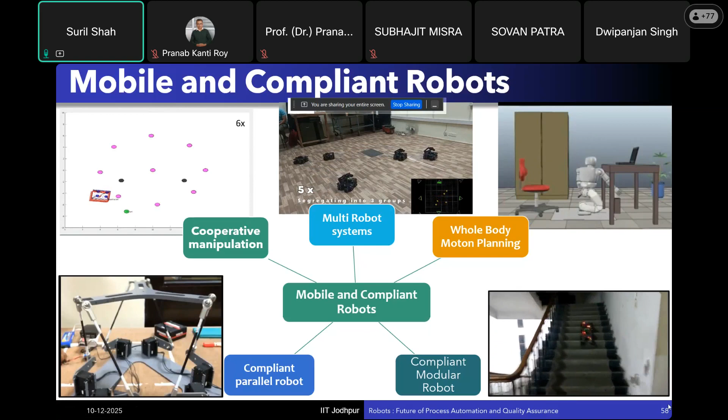We have also developed a dynamic simulator which is freely available. If you are interested, you can look at this recursive dynamic simulator, ReDySim, which has a lot of simulations and examples you can use for your research, to develop your own trajectories and control algorithms.

We have also done a lot of end-user centric technology development. In the first video, we were working with medical industries, with AIIMS Jodhpur, on a project for teledentistry. The second work is a demonstration of some of the work we have done for the Vyomitra half humanoid. We are also working with Johari Digital Ltd., developing algorithms for robotic therapy, where a laser-based therapeutic device will be attached at the end of the robot.

Another interesting work that we have done with TVS Motor as part of a 5-year project at IIT Jodhpur: a self-balancing two-wheeler. They gave us a moped and then we designed an entire control moment gyro. They manufactured it for us, and you can see some perturbations being given by the student, and the moped is actually balancing on its own.

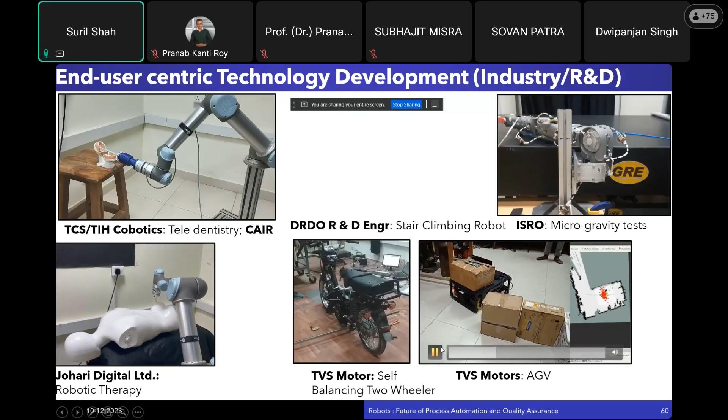We have also built this autonomous guided vehicle, which we designed and built for TVS Motor, and they have taken it back from us.

We also have some in-house developed research platforms: a parallel robot, a space robotic platform, and we assemble quadcopters and quadrupeds. We've been doing interesting work on quadruped reinforcement learning based approaches, and also on whole body motion planning of humanoids, with some hardware. This is some of the facility we have at the robotics lab at IIT Jodhpur, which we have also augmented.

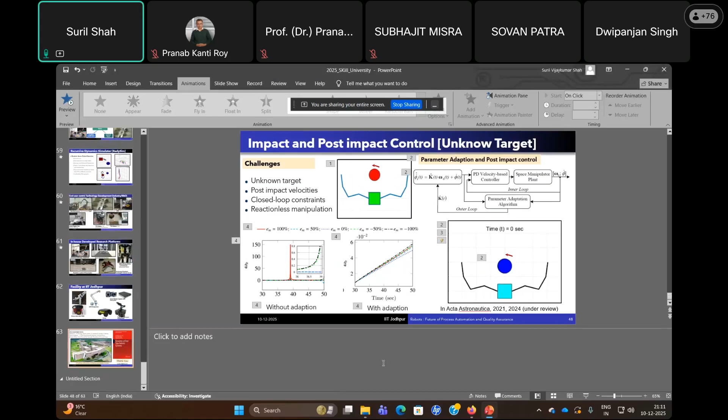Respecting the time, I would like to thank the many students and faculty collaborators who have worked with us. I would also like to emphasize that IIT Jodhpur offers an MTech in Robotics, so if you are interested in pursuing higher studies, please consider it. Last year we moved from Robotics and Mobility Systems to Robotics. I would like to thank you for giving me this opportunity to share some of the thoughts and work being done by us. Thank you, and a personal thanks to Professor Dan - it was wonderful that you could come to IIT Jodhpur and help us design our entrepreneurship curriculum. It was a really nice time when you were here.

Thank you, Professor Shah. Let me tell you, this robotics is an area...

Robotics is always a very interesting and exciting area, an inseparable component in industry. Particularly for Industry 4.0, manufacturing Industry 4.0, robotics and robots are absolutely inseparable.